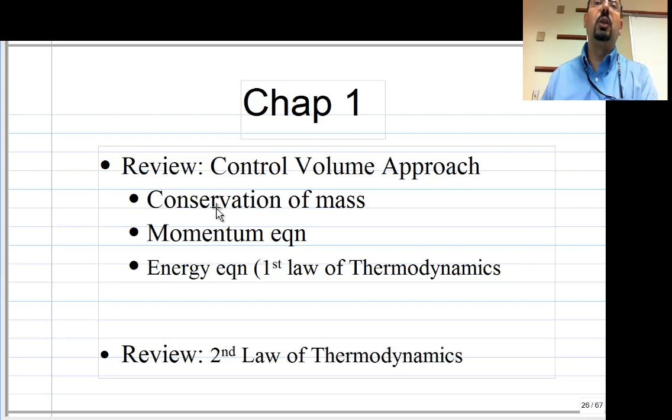Well, let's start reviewing the control volume approach, which includes the conservation of mass, momentum equation, energy equation, and the second law of thermodynamics.

As well, right? So if you open any fluid mechanics book, they will always start with the definition of what is a fluid and how is it different from solid mechanics.

The difference is that a fluid cannot withstand shear stress. The moment you shear it, it will move. But a solid, rubber or steel or whatever, if you basically shear it, it will deform and then stop.

A piece of rubber, you can basically shear it, it will deform a little bit and then it will stop. It takes more force to push for the next degree, and even more force for the next. If this was a piece of wood or steel, you really need to spend a huge amount of force to make even the slightest change.

This is not the case for fluid. Even for the most viscous fluid, still in principle, you shear them. By shearing, I mean you're not pushing on them, you are moving parallel to them. If you are shearing them, they will not resist the movement and they will move.

Of course, the strain rate, or basically how quickly do they move, is different if they are ketchup or water or crude oil. The more viscous, the more force it takes for them to actually move faster.

In this slide, I just would like to remind you that the molecules, if you go to the molecular level, say water as liquid and water as steam—for water, in both cases, if we open a microscope and look at those molecules, they're exactly the same. H2O molecule as water and H2O molecule as gas or vapor or steam, it's exactly the same. So why are they different?

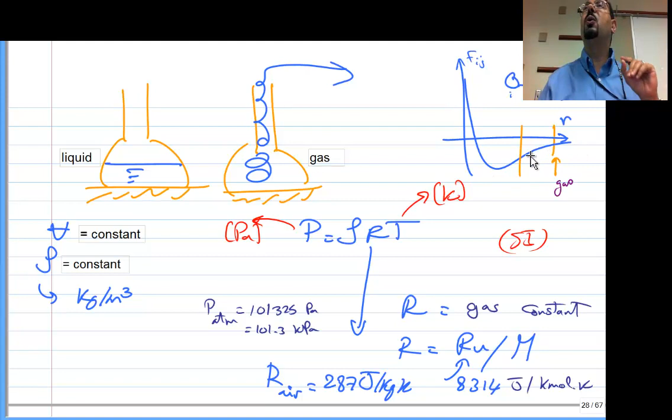So on the way to becoming liquid, in some applications, when the temperature is really cold but not cold enough to become liquid, and the pressure is really high but not high enough to become liquid, you're not dealing with ideal gas anymore - you're dealing with something called real gas. Real gas has a more complicated equation than ideal gas. Any gas that you push toward becoming liquid will start to become a real gas. So it depends on your application whether this approximation is good enough, or whether the temperature is really low and pressure really high enough that you need to move to the real gas equation.

So in this course, no matter the temperature or pressure, we are doing ideal gas. For the rest of the course, forget about real gas - it's P equals rho R T. We'll take the easiest way out and call our gases ideal gas. But know that if the pressure is really high or the temperature really low, you may deviate from ideal gas.

For example, that's why in thermodynamics with steam, you don't use P equals rho R T, even though steam is a gas. Why do you keep using steam tables instead? It's because steam is not really superheated enough to be treated as an ideal gas. So the air in this room is ideal gas - why? Because at 85 Fahrenheit, it's very far away from its liquid state. To make nitrogen liquid, the temperature needs to be really low.

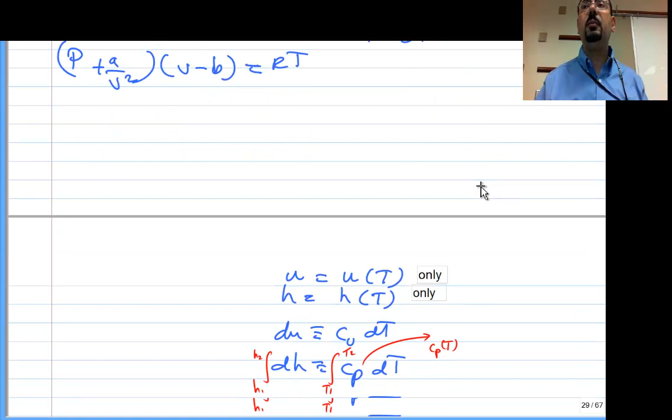So we said we are going to follow basically the ideal gas equation, P equals rho RT. The enthalpy H and the internal energy U are actually properties. To get the enthalpy, you need two properties, you need to know the temperature and say the pressure. Remember in the steam table, you need the temperature and the entropy, or the temperature and the specific volume, and then you can put your hand on the enthalpy. So it should be a function of two properties. But we will actually deal with just H as a function of T and U as a function of T. All right? So, thermally perfect gas.

Not only that, but by definition, dH is Cp dT. Cp is the specific heat at constant pressure, and Cv is the specific heat at constant volume. That's U and that's H. So by definition, dU is Cv dT and dH is Cp dT.

What does that mean? If you want to get the difference in enthalpy as you heat the gas from 100 degrees to 200, you need to integrate over Cp. You say Cp dT and integrate. We are not going to do this, we will just assume constant Cp and constant Cv. In the exam paper, on the cover, you will see for air Cp is 1004.5 joule per kilogram Kelvin, for example. But know that Cp is really a function of temperature. You cannot just take it outside the integration and say dH is Cp delta T. That's only if you assume constant Cp and Cv.

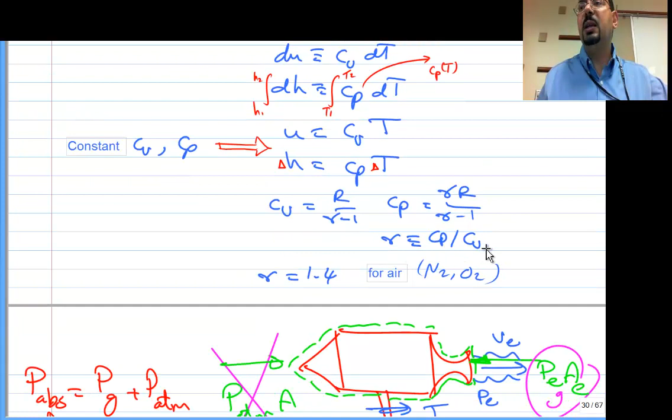Cv is R over gamma minus 1, and Cp is gamma R over gamma minus 1. When you divide the two, R and gamma minus 1 cancel, and you end up with gamma equals Cp over Cv. By definition, gamma, the specific heat ratio, which is very important for us in this course, is basically 1.4 for air. So gamma is the ratio between Cp and Cv. If you open other textbooks in the library, you will find that sometimes gamma is called K instead.

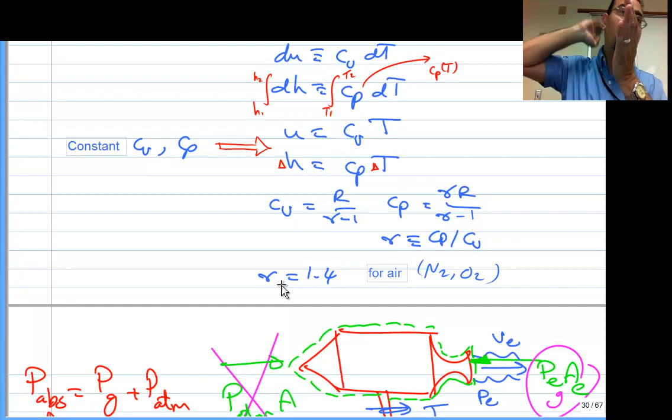But anyway, this ratio will show up in all the equations, to the extent that the appendix C's at the end of the book, for every chapter, have appendices we can use for solutions. You will find in every chapter there are three appendices for three gammas. So the difference would be, this table is for gamma 1.4, this is for gamma 1.3, this is for gamma whatever.

Very good, so now the pressure. You know there is something called absolute pressure and something called gauge pressure. The difference between the two is that the atmospheric pressure is subtracted. Let's say in this room the pressure is atmospheric, 101.325 kilopascal. Let's say for whatever reason someone pressurized the air in this class and it's not 101.325, it's 102 — that's the absolute pressure. So if I ask what is the gauge pressure in this room, you would tell me 102 minus 101, so the gauge pressure would be 1 kilopascal. The absolute pressure is 102, and the gauge pressure, how high you are above atmospheric, is the gauge pressure.

I remember, when taking my fluids course as a student, one of my biggest problems was knowing when to use gauge pressure and when to use absolute pressure. That was a horrible problem for me, I couldn't really answer it, and I spent a lot of time with my TA trying to understand it. So, when do I use gauge pressure and when do I use absolute pressure? Here is when.

When you are using the ideal gas equation, P equals rho RT, let me ask first, what temperature should you use, degree C or Kelvin? Kelvin, the absolute temperature — that's what will remind you. If you use the absolute temperature, then you must use the absolute pressure. So when it comes to the equation of state, use the absolute pressure. When you think about it, the equation of state really needs the actual pressure, the real pressure, not the difference between that pressure and the pressure outside.

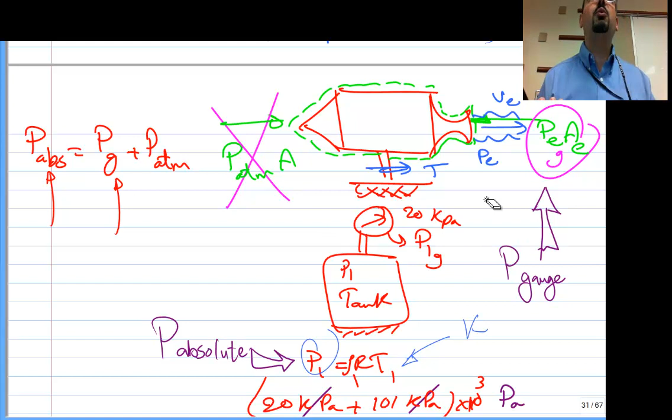It's useful when you are doing force calculation, when you are using the momentum equation to find the thrust on a rocket engine. Anytime you use the momentum equation to find the forces, you have to include all the forces acting on that control volume, whether it's a jet engine or a jet ski. That's your homework, we'll see it at the end. Your homework is a jet ski, and you're trying to find the force that the engine generates. So you want to put the forces.

So what are the forces acting on a jet engine sitting on a test stand in your lab you are trying to test? One of them would be the pressure forces, right? So you will have to put the pressure at the exit. I'm calling it P exit, area exit. That's the force, because what's the unit of pressure? Pascal, which is Newton per meter square. So that's why when you get the pressure force, you multiply by the meter square, you multiply by the area, so you get the force. So the pressure force is the pressure times its area.

So I will put P exit, area exit, like this. And by the way, is P exit atmospheric, higher than atmospheric, or lower than atmospheric? What do you think? Because it has velocity.

I don't think that's right. I think as soon as it leaves the end, it goes to atmospheric. That's a good point — he will need to feel the outside, and the outside is atmospheric, right? Anyone? So I heard lower than atmospheric because it has velocity, and he needs to feel what's going on outside and adjust himself. Anyone saying higher? Anyone?

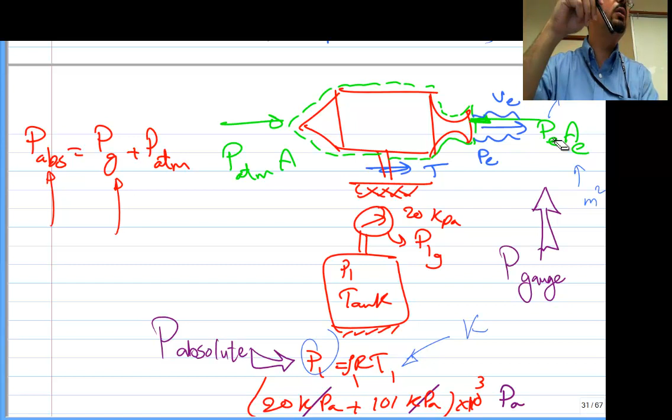So if this was a subsonic jet flow, it has to be atmospheric — there's no question that it has to be atmospheric. He would feel the pressure immediately. But supersonic flow has a mind of its own. He can afford to be different. He can actually leave lower or higher than the pressure outside, but eventually he needs to feel the pressure outside.

That's why those diamonds — we'll spend one chapter trying to understand those diamond trails behind an airplane flying. It was because of this: he was trying, 'oh, I'm higher than the atmosphere, let me get lower, oh I overshot, let's go higher, lower, higher, lower,' until eventually he settled down on the atmosphere and basically just become atmospheric. So as long as the problem says it's subsonic, we're good at P equals atmospheric. But really subsonic — so actually forget about this, it's like Fluids 1. In this course we can afford to be different.

So this P exit can be either higher or lower than atmospheric pressure, right? It can be either higher or lower. So now the other side I have to put P atmosphere, right? Is P atmosphere only on the front? All around — it's actually everywhere.

And look at this geometry — if I'm writing the x momentum equation, because the momentum equation can be written in the x direction or y direction. In the homework, you will choose what direction to write to get what you need. For example, here, if you want to get the thrust, are you interested in the x or the y? You want the x momentum equation, because that thrust will show up in the x momentum equation.

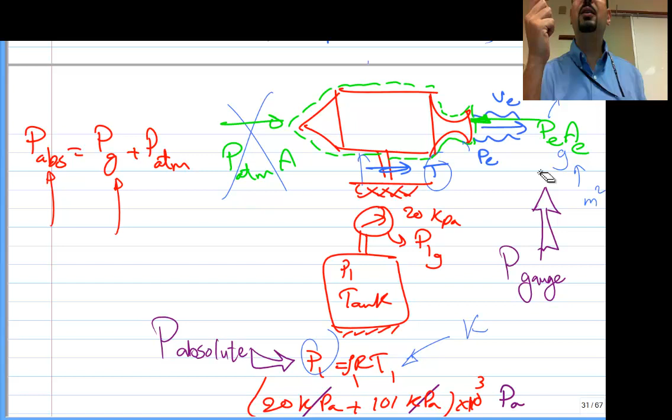So that was pretty good when I was undergrad, except the homework problem came with this rocket that went to space. Now I'm lost again. What should I do now? Should I use absolute or gauge in space?

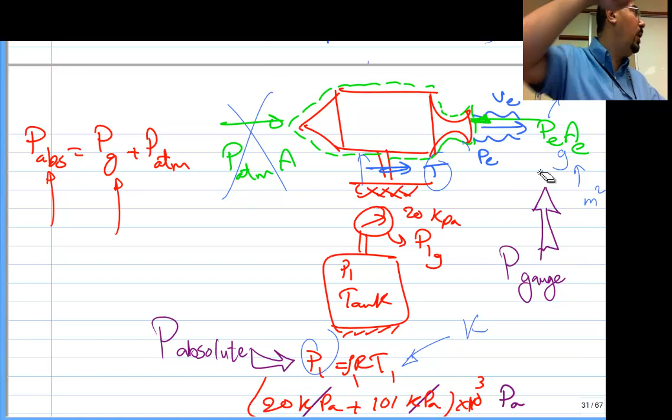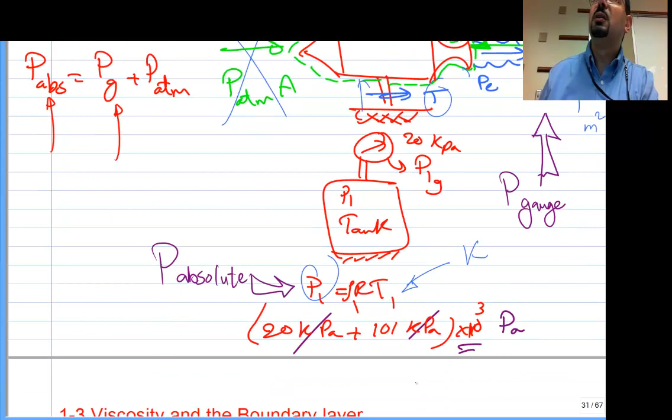Doesn't matter. It doesn't matter, but you want to memorize the rule. Well, if you go to space, you don't have to worry about the atmosphere because everywhere it's zero. The ambient pressure is zero everywhere, right? So you use the gauge when you want to cancel the atmospheric pressure everywhere around this, and use the absolute in the equation of state, when you say P equals rho RT.

The viscosity and the boundary layer. So in this course, you will see me drawing velocity profiles like this. The velocity is uniform throughout the nozzle -- the area is getting bigger or smaller and the velocity is changing, but I will plot the velocity profile uniform all over the place. That's a simplification, that's not the true thing.

If I zoom in near here, near the wall, you will see something like this. This is called the boundary layer. You will learn about this in 4273 -- let's call it fluid 3 -- that's experimental fluid dynamics. You will hear about how to calculate this. This is actually very important when it comes to friction -- all the friction loss with the wall happens in this place.

As a matter of fact, the flow on top of that boundary layer can be considered as if it's inviscid, or frictionless. There's no friction on top of that. All the friction is located near the wall. And so when you think about it, why is it sticking to the wall like this? Why does the velocity here need to be zero like this? Why is the wall holding it?

Because it's not perfectly smooth. If you zoom in here again, let's magnify our microscope and look here. The wall, no matter how perfect your machining is, even if you did the best polishing ever invented, the wall on a molecular level is basically this rough. Those blue dots, that's my impression of molecules -- so here is the air molecule. They cannot afford to go with a different velocity than the wall. Why? Because they are not really on the wall, they are in the wall.

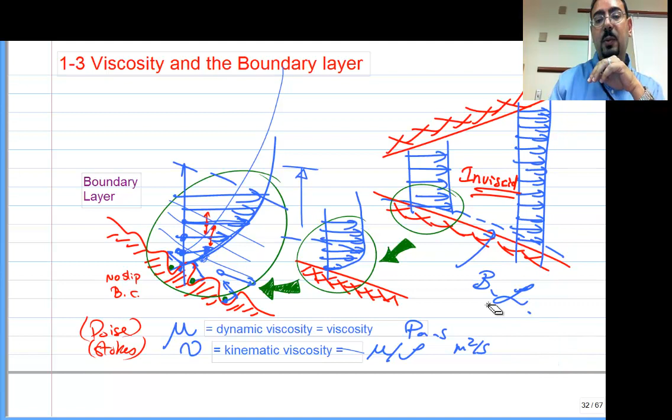So what I'm trying to say is that we will ignore this layer for the majority of this course. Only when we get to chapter 9 will we consider flow with friction. And even in that chapter, we'll basically just calculate the friction loss. But we'll still mainly care about the majority of the flow, not that small part near the wall.

Yes, Yang? So say you have something pushing from behind, like a piston. What would the velocity be just where it's touching the piston? Would it be the speed of the piston? So if the piston is moving like this in a cylinder, the question is what the velocity profile will look like. We'll actually deal with this in chapter 2. We'll see a piston moving and what happens. But basically everyone in front of the piston doesn't have a choice, they've got to move or go into the piston, which they can't.

But then over here, what do you think happens? Those a little bit far away from the piston, they're going to have a delay. So Tim is saying the same thing, that if the piston moves, everything should move. Tim is thinking Fluids 1.

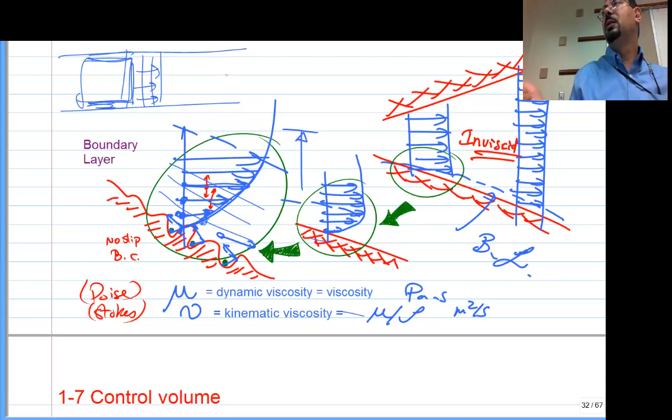And that's true, if this was water, when the piston moves, the whole thing moves. But if this is compressible flow and that piston moves, we'll see the answer in chapter 2, you'll see this next week. We'll spend time understanding how much difference it makes that the flow is compressible. But basically, incompressible flow is like this fluid is a piece of stick, a stick of wood. Imagine if you push one side of the stick, what happens to the other end? The whole thing moves as one piece. That's what incompressible fluid does, but not compressible flow.

Okay, so now to review the control volume approach, this is what you had in Fluids 1. Basically, the difference between a control volume and a system is that a system is when you care about a bunch of molecules, you know them by name, like a bunch of students. You are tracking those students as they go outside the classroom, start going to their cars, moving with their cars to different places. At every moment, the number of those molecules, the number of those students, is conserved. They cannot disappear, and no new student can be created, right?

But if you care, and that's the case in most engineering applications, we don't care about an air molecule, we care about a volume, our jet engine, our classroom. How hot does it get? You have a space, and you care about that space, its mass, forces acting on it, its energy. So that classroom can see an increase or decrease in the number of students in it. So the physics of a system is pretty simple. For example, dm/dt for a system is 0. But dm/dt for a control volume, is it 0? It can actually be plus or minus, depending on what?

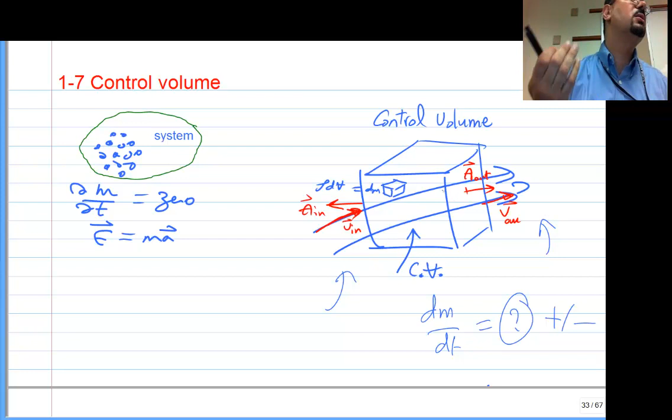That is actually the second homework problem that you have. You have an air tank fed by a compressor at a certain flow rate. The outlet, a toolbox or a tool using a certain flow rate to run, and he's asking you about what happened to the mass inside that tank. Will the mass build up or will the mass decrease?

So how do you solve a problem like this? The continuity equation, right? The continuity equation, the momentum equation, the energy equation, they are all actually copies of one big equation. It's called the Reynolds transport equation. All of them are basically just telling you what happened to a property that you are tracking over that control volume. What happened to that property? Will it disappear, decrease, or increase?

So this is a fancy name and a fancy equation for something that's really simple, all right? When I was a student, I loved to write this equation. It made me feel so smart because, I mean, look at it. That's a triple integration, and you have partial t in front of it. And look at this. This is the integration over the surface, and you have two vectors dot product. You write this equation in front of any of your friends that's not in engineering, and it's like, wow, is this English? What is that?

That's amazing. But this equation, you never really use it in that form. We use it in a much simpler form, but this is a more general form that can deal with any problem, right? This equation basically tells you that x, that property that we are tracking, whether it's mass, or momentum mv, or energy—not just kinetic energy, which includes kinetic, potential, internal energy, all energy, capital E. So that small e is not internal energy, that's the total energy per unit mass. Any one of those is x that we are tracking, right?

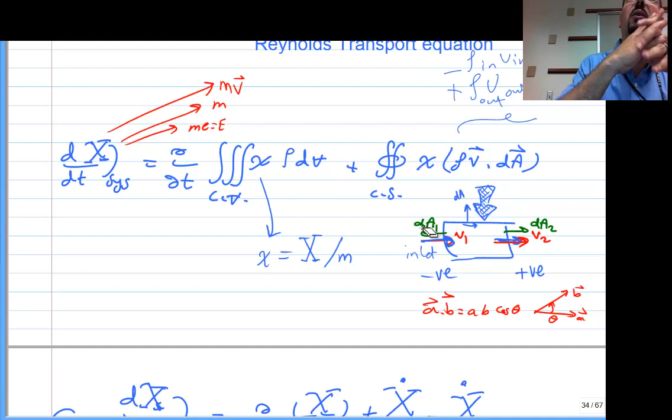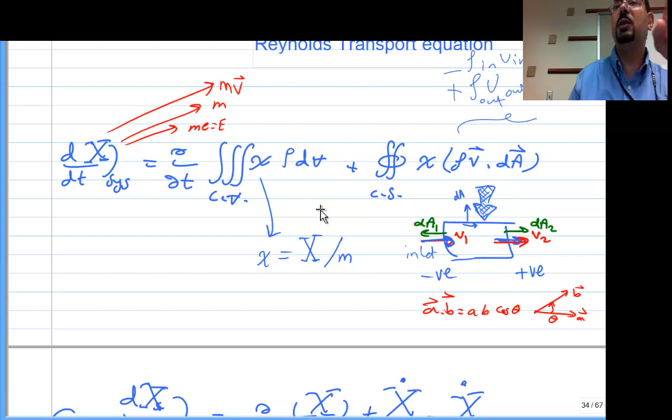Okay, so this fancy form, I would encourage you to keep writing it to convince yourself you're really smart. It did work for me. I really like writing it.

This will actually just boil down to this when you think about it. He's basically saying dx by dt system is what? X rho dv. Rho dv, that's density multiplied by volume. That's dm, the mass of a small place inside the control volume, multiplied by the small x. That small x is capital X over m, it's the x per unit mass. So if I multiply the x by all the mass, what do I get? All the x.

Again, it's partial t x control volume, or basically the rate of change of that x. How much does the mass inside the control volume change with time? Is the compressor tank building up or depleting?

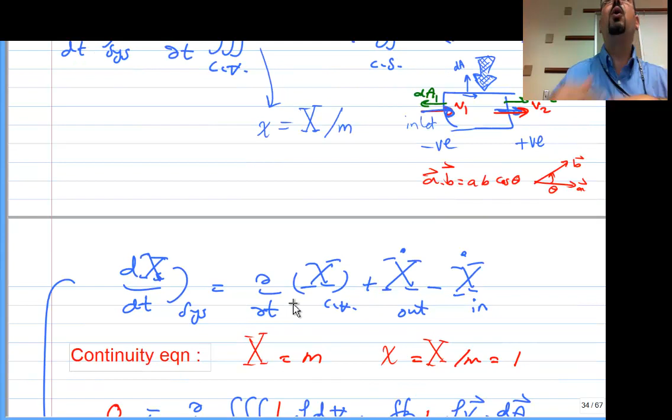So why all the trouble? Why couldn't he just have said partial t x control volume? Because he was basically saying, in case you have a tank with different fluids, maybe you're working in a refinery, and that lower layer is really heavier than the higher one, you have different density. He's basically telling you, well, each volume by its density, each volume by. So this is kind of the general form, all right, that will work for any problem. Of course, if the whole thing is one density, go for it. Just partial t x control volume.

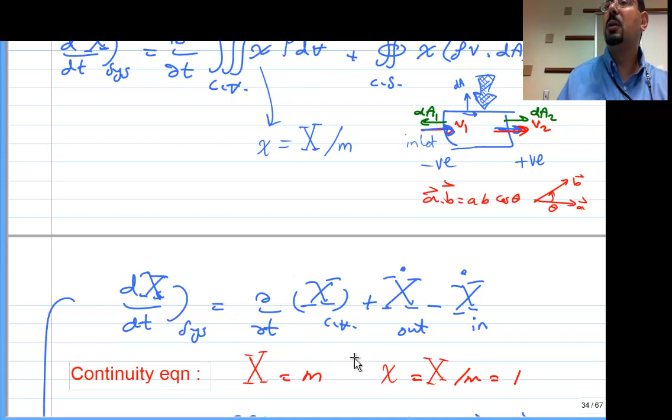And again, this will just boil down to partial t x control volume plus x dot out minus x dot in, that's the rate. So now when you look at this equation, he's basically telling you that dx by dt system is the rate of change of that x inside the control volume plus x dot out minus x dot in.

Don't even worry about this. We are not going to use it like this even. We'll get much simpler than that. Let's worry about the actual cases.

When x is the mass, then dx by dt, the rate of change of mass with time for a system, is 0. And those guys will simply be partial t m control volume plus m dot out minus m dot in. Or if we rearrange, it basically says m dot n minus m dot out. What's m dot n minus m dot out? The net coming in minus the net leaving. That's the net staying, that's the partial t m control volume.

And you didn't need Reynolds to tell you this, you didn't need me to tell you this. If anyone with any sound mind will say, if there is 10 kilogram per second coming in and 8 leaving, you have plus 2 kilogram per second staying in this classroom.

All right, so what I'm trying to tell you is that this is the equation that you worry about. That's the control volume approach to solve the continuity equation. But this is the one that really makes sense when you think about it.

And for most applications, when it's steady state, even this term goes to 0, and m dot in becomes m dot out. If there is no storage, and think about it, most engines are designed so that they wouldn't explode from us, right? Whatever comes in needs to leave. I mean, you'd have a problem if there is a blockage and nothing leaves, right? So most problems, you just have m dot in equal m dot out.

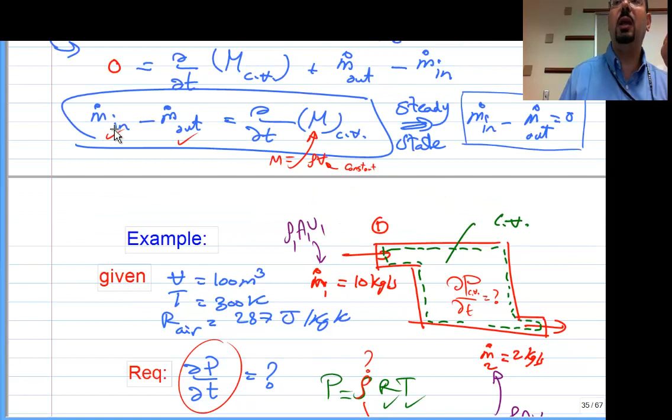Obviously, the mass inside is building, right? And what does he want from us? He wants not just to tell him that dm by dt is obviously 8 kilogram per second, that's easy. It would just be writing this and saying, well, 10 minus 2 equals this, and then it's plus 8 kilogram per second. No, he wants partial P, partial T.

He would like to find out what is the pressure rate of change inside that volume. And he's saying the temperature is constant throughout the problem, 300 Kelvin. Is that a good assumption? Yeah, if the tank is really not insulated and that process happens slowly, the tank will keep up with the ambient and remain at constant temperature. It's not a bad assumption. So how am I going to get partial P, partial T? That's what he's asking for.

So in this course, there are actually 3 equations: continuity, momentum, and energy equation. So when in doubt, when you don't know the answer, you have a 30% chance of getting it right by just basically picking one of them. And since I've only covered the continuity equation so far, chances are the solution will come from the continuity equation.

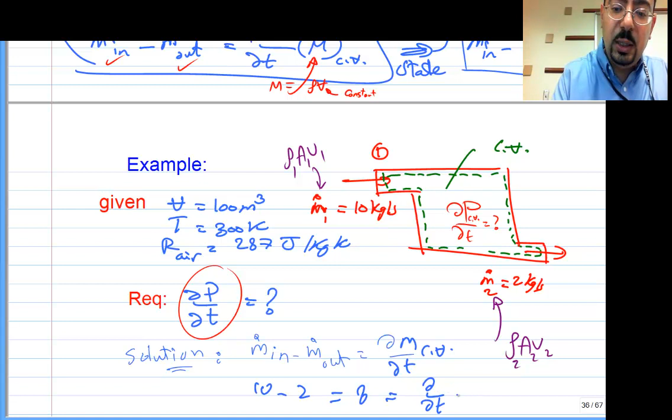So let's write the continuity equation, which will basically say m dot in minus m dot out equal to partial m partial t control volume. And so it's 10 minus 2, so that's 8. Well, that 8 is partial t m control volume. Right, so I did the continuity equation.

Now, how am I going to get the pressure? How is that pressure he's asking for related to the m, the mass inside the control volume that we calculate? The density is, P equal rho RT. What do you want to do with that density? Well, you have your volume. Excellent. How many pounds are inside the tank.

Excellent. So partial t of m is actually rho times V, rho times the volume, and that volume is constant. So actually we can bring that volume outside the differentiation, right? It becomes partial t of rho.

And that density from the ideal gas equation, rho then becomes P over RT. And notice that R is constant, that's the constant for air, and T is constant because he said this problem is isothermal. So I can take all those guys outside, and so it's volume over RT, and then all I have is partial P, partial t.

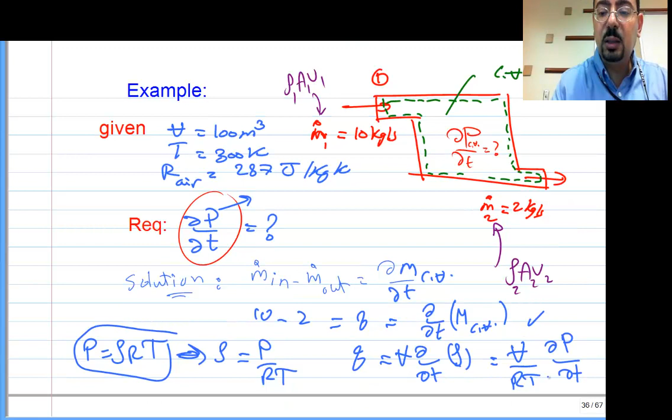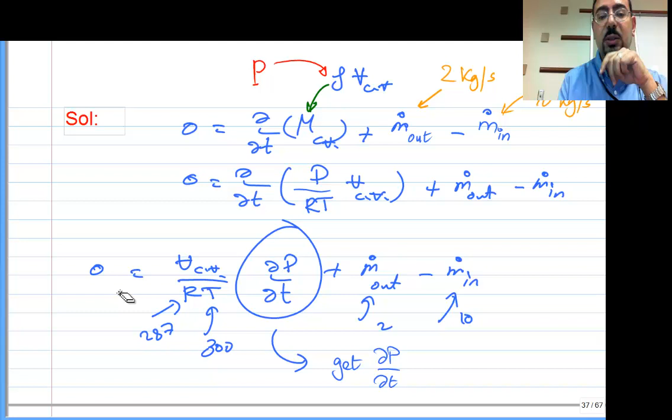All this is equal to 8 kilogram per second. And so we have the volume, it's 100, I have the temperature, I have the R, I've got my hand on partial P, partial t. And so that's a cleaner version of this. It basically tells you that partial t multiplied by the volume over R over T is equal to the difference between m dot in and m dot out.

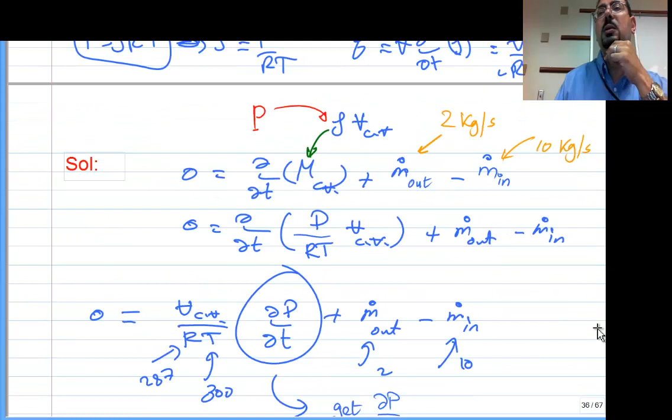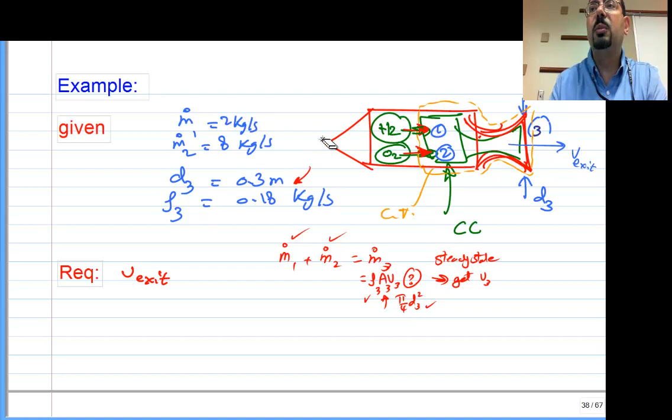Right, question about this? So let's look at another one. So here's a rocket engine, he's got his hydrogen and oxygen. The flow rate coming from this tank, the hydrogen, is 2 kilogram per second, the flow rate coming from the oxygen tank is 8 kilogram per second, and the diameter at the exit of this nozzle is 0.3 meter and the density is 0.18. What does he want? He wants the velocity at this exit. So this is a combustion chamber where he dumps the fuel and the oxygen.

So let me ask you first, is this equation unsteady, so that I would write partial m partial t equal to m dot in minus m dot out, or is this problem steady state so that I could write m dot in equal m dot out? It should be steady state. Yeah, so this rocket is not steady, but the engine is steady state, right? The rocket is losing its fuel and oxygen, but the engine is steady state. That combustion chamber sees a continuous flow of the fuel and oxygen and a continuous exit at the back.

So because the problem is steady state, then, you know, when I was a student, I used to love to write always the equation from the start. Even if I know that it will boil down to m dot in equal m dot out, it just gives me a chance to calm down while solving the problem, because I start with the equation that I know is never wrong. Because the general equation, that's the mothership, all the problems will come from that equation.

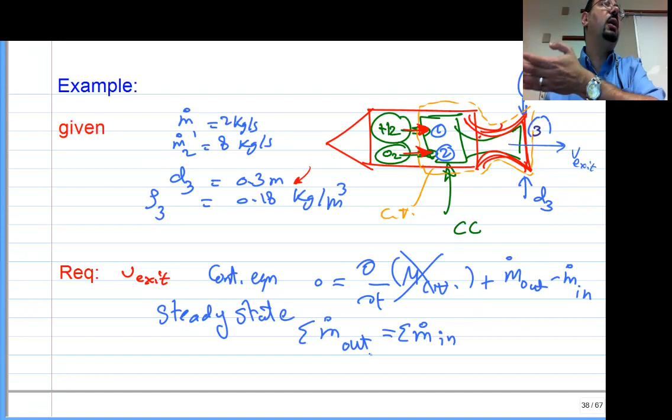So now, since it's steady state, this term will cancel, and we will end up with basically just m dot out equal m dot in. It's actually sigma m dot out equal sigma m dot in, not just one. If you have multiple inlets and multiple outlets, everything coming in should be equal to everything leaving. So this then boils down to m dot 1 plus m dot 2 equal m dot 3.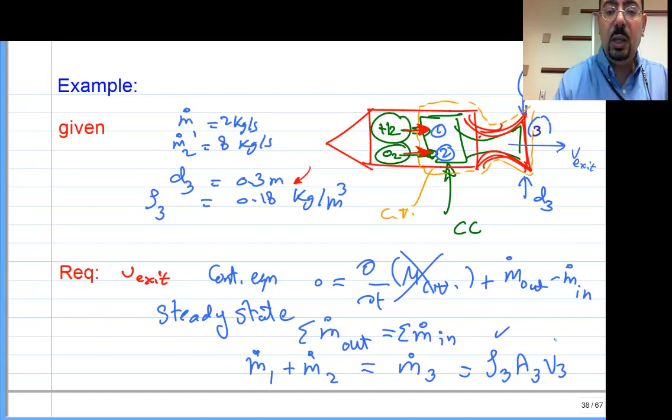And of course, m dot 3 is rho 3, area 3, V3. You have rho 3, the 0.18 kilogram per meter cube, the area 3 - you almost have it. You have the diameter. You know how to calculate the area from the diameter, right? Pi over 4 d squared.

And then you calculate the V that he wants. So here's a cleaner version of it. He's basically assuming steady state, writing the continuity equation, and then calculating V3.

So this cartoon, I just want to remind you that when we say rho A V to calculate the m dot, that V should be relative and should be normal. The normal part, we talked about this, right? Only the velocity component normal to the area really goes through the area.

There is this one country in Somalia, in Africa, that has a lot of rain that comes near the coast, but nothing really goes inside. As a result, the country is almost desert, because all the rain goes parallel to the surface. Because the velocity component is 0, right? It's all parallel. So always remember this: if you're just moving parallel to the surface, nothing will go into the country - nothing will go inside the control volume.

I'm basically saying, if you have a truck and someone is trying to hose you with water, only if the flow crosses the boundary will you end up getting water in the truck, right? So what does this mean? It means that if this car is moving at 10 meters per second and the water jet is also moving at 10 meters per second, yes, there is a normal component - the whole thing is moving normal to the control volume. But if they are moving at the same speed, nothing will go inside. So that's why it's not just normal, but also has to be relative.

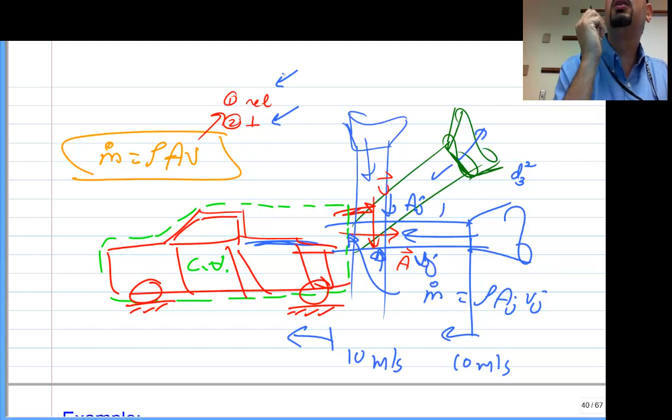What does it mean, relative? There is V absolute, and there is V relative. V absolute is someone standing on the street measuring the velocity of the water as 10 meters per second. A relative velocity would be someone standing on the control volume, measuring the velocity of the jet. So there is an equation - you don't have to guess. Yes, it's 0, but you don't have to guess. The equation is V absolute equals V relative plus V control volume.

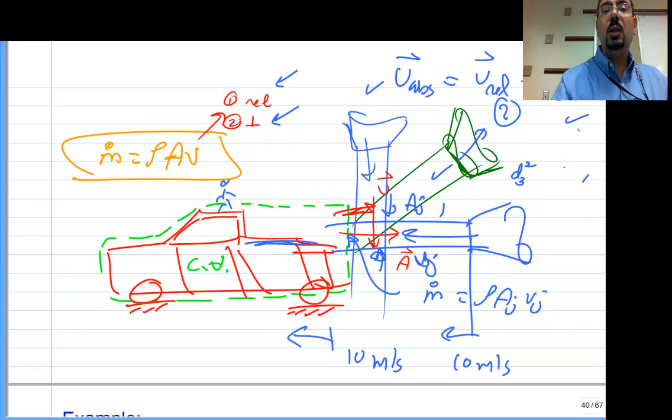So if you're wondering what V control volume is, and you know this one, and you're wondering what V relative is, and you know V control volume and V absolute, all you have to do is say V relative is V absolute minus V control volume. So yes, 10 minus 10, you end up with 0. Those two things are very important: it has to be relative, and it has to be normal to the area. That's what makes the velocity component that you use in the continuity equation correct.

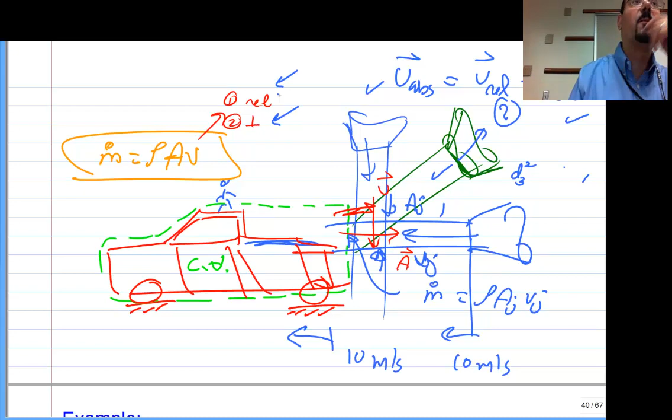You had a question: can you remind me one more time why we consider the rocket steady state? So the rocket itself is not steady state - it's the combustion chamber, this part, the part that I highlighted in orange as my control volume that I'm writing the equation for.

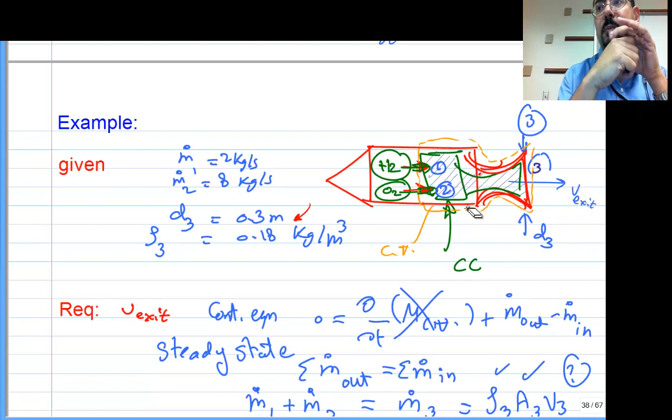So what makes it steady state? If I take a picture now, and then wait until the exhaust comes out and take another picture, that's not steady state - something is different. But the combustion chamber itself, if I take a picture now and take a picture after a few seconds, doesn't have any change in it, right? So the mass of the control volume, which is the combustion chamber, not the whole rocket, is constant. Nothing gets stored, nothing gets depleted. So in short, if partial over partial T is 0, that's what makes it steady state.

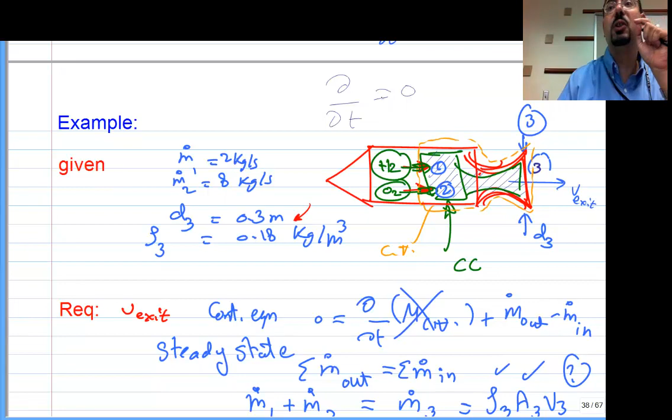Okay, for the problem, partial T is 0. So again, the velocity component that we should use here, it should be relative and normal.

In this problem, there's a nozzle and a shock wave standing like this. You can see the shock wave. We'll spend one chapter understanding what this shock wave is. It looks, even in the picture, like a discontinuity in the flow. It's very, very thin, on the order of magnitude of the mean free path. We're talking about a very, very small distance.

The flow before it is Mach number 2, and the flow after it is Mach number 0.5. What happened? It's as if someone brought two things and patched them together. Like the new Honda Odyssey, you feel like someone brought two cars and patched them together. Exactly, there's a discontinuity, right? That's what a shock wave is. Basically just two different flows. What happens there, we will spend chapter 4 on it.

In this problem, he's giving us things at 1, and he's asking basically for the velocity at 2. And this shock wave is so thin to the extent that area 1 is the same as area 2. So although in real life it's like something like this, it happened over such a small area, such a small space, that area 1 is the same as area 2.

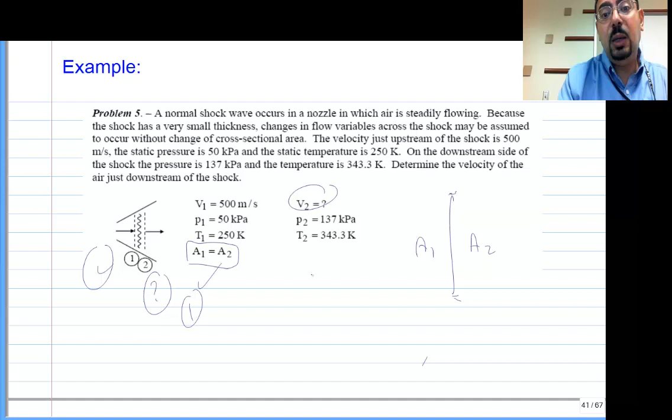So knowing V1, P1, and T1, and P2 and T2, he would like V2. How do you solve this problem? You know everything before, and you would like to know the velocity after. How do you solve a problem like this? P equal rho RT will only give you the density, right? Rho RT, we will use this to come up with rho 2. But where is the velocity? How can I get V2?

The velocity after the shock. Well, wouldn't you just set them equal to each other? What equal to each other? The two sides, yeah, what exactly on the two sides? You want to say what equal to what? Area 1 and area 2? That's what you... the density as well. You'd have to do the density as well. You want to tell me rho 1 equal rho 2?

Well, it's the mass flow that is equal. The mass flow, so it's rho A V. Right, m dot 1 is m dot 2. And let's ask ourselves why m dot 1 equal m dot 2? Who said this problem is steady?

I want someone to prove to me that this problem is steady. The problem says it's steadily flowing. That means that this thing is standing in its place. But what I'm saying, why is the mass... it's not increasing or decreasing, it's only what comes in. That's my question, why?

So what do you mean the area is the same? That's the right answer, but I want to put more words into it. What do you mean area 1 equal area 2? That's why the mass flow rate is the same as the mass flow rate, because if area 1 equal area 2, that means... I want someone to give me just a little bit more than it's the same area, it's the same place, it's not moving. I want one more statement.

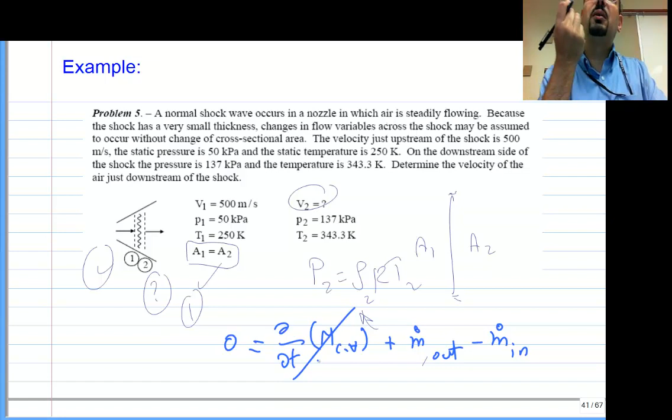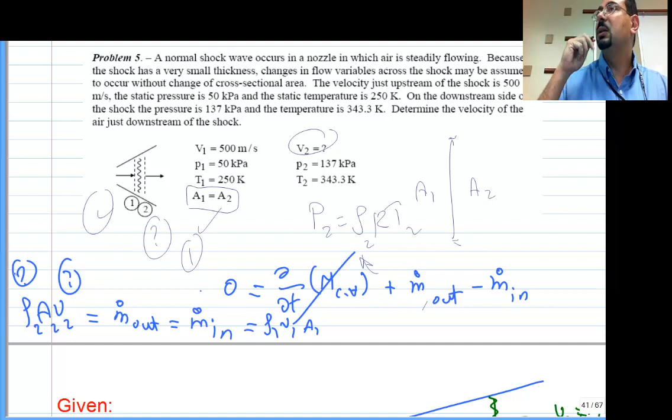After that, the problem is easy. M dot out equal m dot in, and m dot out is rho A V, with rho 2, area 2, V2, and m dot in is rho 1, area 1, V1. So we basically got everything at the inlet. The only thing that's missing at the outlet is V2 and rho 2, and that's when rho equal P over RT comes in.

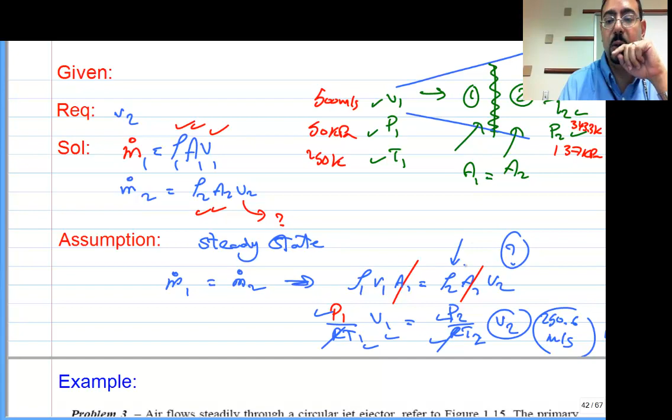So here's what's going on: he basically says steady state, m dot 1 equal m dot 2, and he set the two equations together, and the only thing that's missing is V2 once he puts his hand on rho 2. All right, I'll let you solve this one, you have it in the notes.

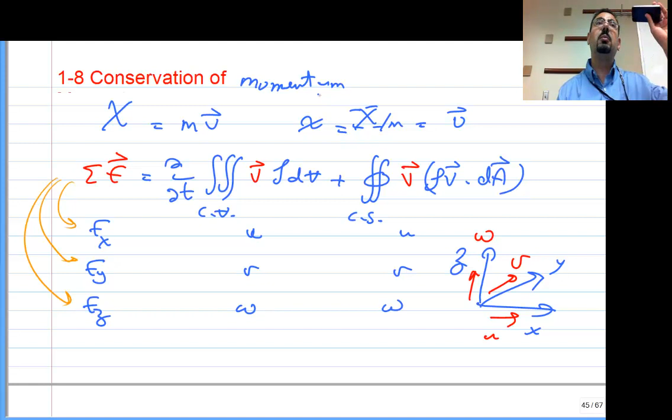Conservation of momentum: mv, that's momentum. So dm by dt for a system, what's the rate of change of the mass of that iPhone? Zero - he's not going to lose his mass, he's not increasing his mass. But the momentum of that iPhone could change, right? That iPhone could be standing like this and then start moving. Why? Force. You give him a force, he increases his momentum. That's Newton's second law.

Remember here there was partial dx by dt of a system, that's the force. So the forces acting will change the linear momentum of the control volume. What is the linear momentum of the control volume? There's momentum leaving with the flow, momentum coming with the flow, and the control volume itself could have its own momentum. It could be a rocket engine that's accelerating, or a jet ski - it could change its velocity, it could add. So here is the momentum equation.

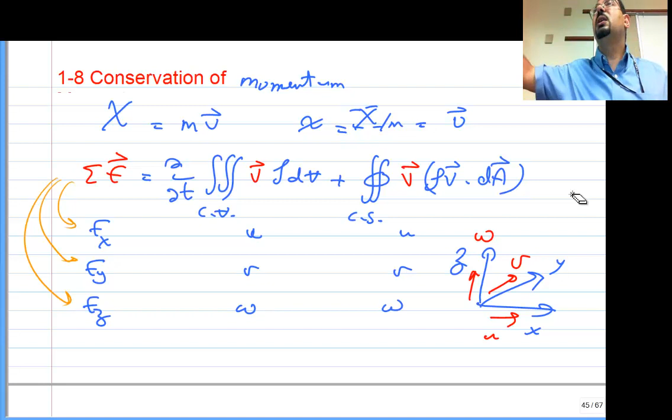That's the fancy form that just looks nice, but we will solve it in a much easier form. I just want to tell you this is actually not one equation - it's 3 equations. You see those vectors on the force and the velocity? That means I can write this whole equation in the x direction, y direction, z direction. So this is 3 equations, not 1, and we choose to write the one that's useful for us. We want the force in the x direction, we write the x momentum equation; the y direction, the y momentum equation.

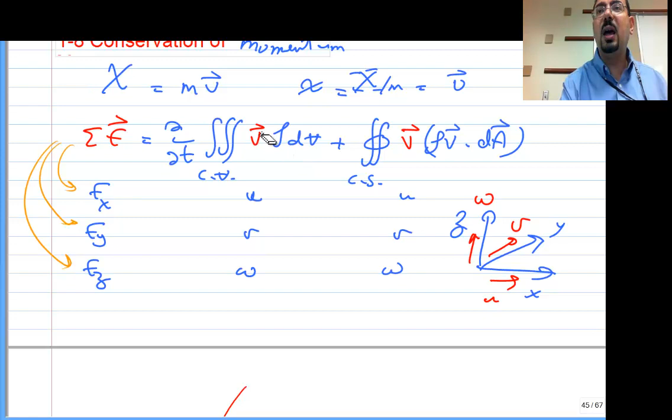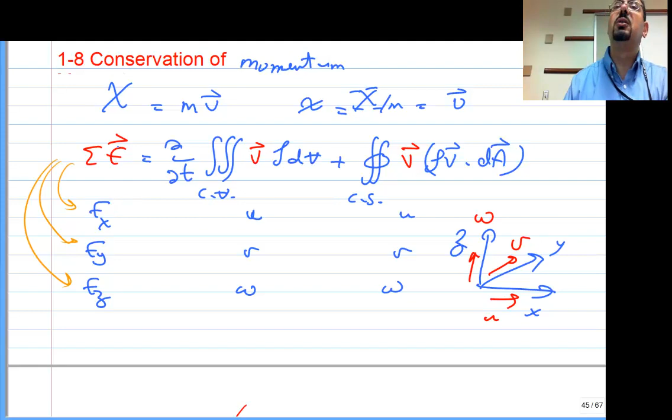So again, the whole thing here is basically just mass times velocity in case the mass is uniform. So you end up with mv control volume. And this over here is simply rho VA plus rho VA for m dot out, minus rho AV for m dot in - that's why you see plus m dot out and minus m dot in. And the small x that was here is now basically v, and here that's dx by dt, that's the force. So that's how the momentum equation looks.

So now those velocities - there's a velocity inside the m dot, and that velocity in the m dot, does it have to be relative or absolute? The velocity I used to calculate m dot as rho AV, does it need to be relative or absolute? It has to be relative, always relative. Because if it's absolute, you may make a mistake - like a jet engine moving at 10 meters per second, you'd think you have a lot of flow rate, but no, it's 0. It's the relative velocity that counts.

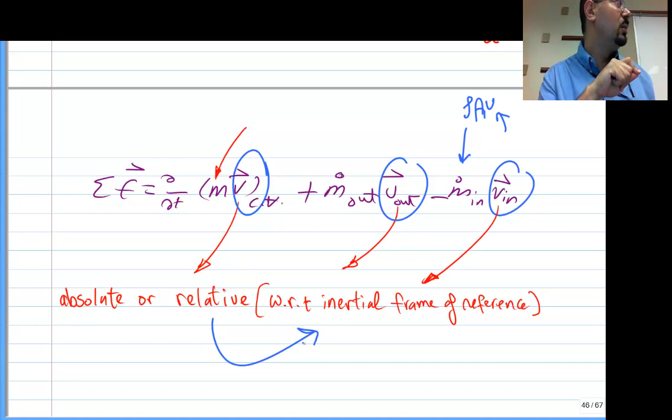So something like this is not an inertial frame of reference. If you use velocity relative to it, you will be making an error in the problem. So you would have to use the absolute velocity — the actual velocity with respect to someone that's not moving. But if the thing is moving with uniform velocity, then both of them work.

But again, you have to treat all of them the same way. The three velocities — at inlet, outlet, and the control volume — should all be either uniform, all relative, or all absolute. Questions?

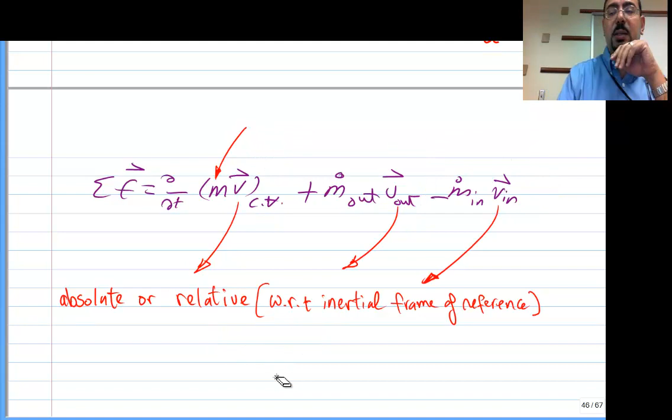So let's see some examples on this. This is a rocket engine sitting on a stand. So it doesn't really matter, absolute or relative, in this problem because the control volume is not moving. So the velocity relative to it, or the absolute velocity, is the same.

Anyway, what he basically says is that there is stuff leaving behind — hot gases at 800 meters per second. Look at the pressure: 50 kilopascal. It's not atmospheric. He can do this because it's probably supersonic, so he can go with lower pressure than atmosphere. It can work. It's possible. And area 2, that's the exit area, is 0.01, and this is the mass flux.

So what does he want? He wants the thrust that will be generated on the test stand holding the thing. Right?

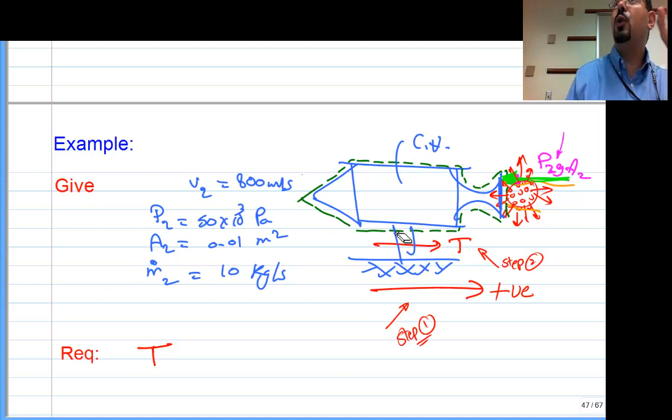So what equation should I use — continuity equation or momentum equation? No, when we ask about forces, it has to be the momentum equation. See, the momentum equation has the force in it.

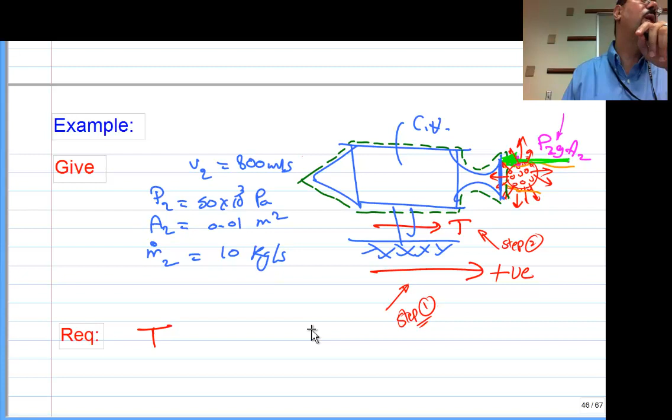And only the x direction, right? We don't have to write the y momentum equation. Actually, when we write the y momentum equation, we will get 0 equals 0. I mean, there is no force generated vertically, and there is no velocity in the vertical direction — everything is leaving horizontally.

So what I'm saying here is that before you write the momentum equation, before you try to calculate the force, step one is: decide what is the plus direction. Any vector equation — even if we are writing only the x momentum equation, forget about y and z — even in the x, the force can be plus 800 Newton or minus 800 Newton, depending on whether you're in the x direction or the opposite x direction.

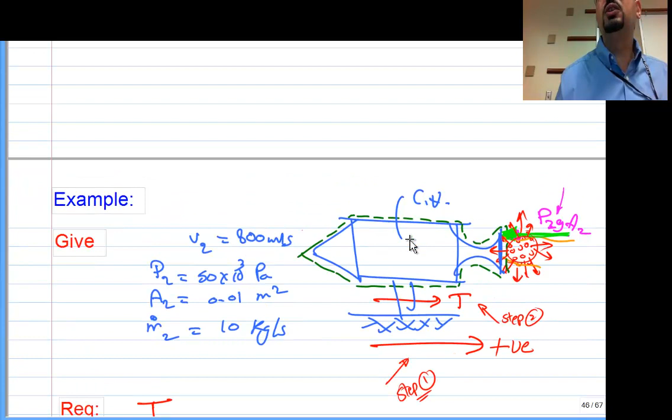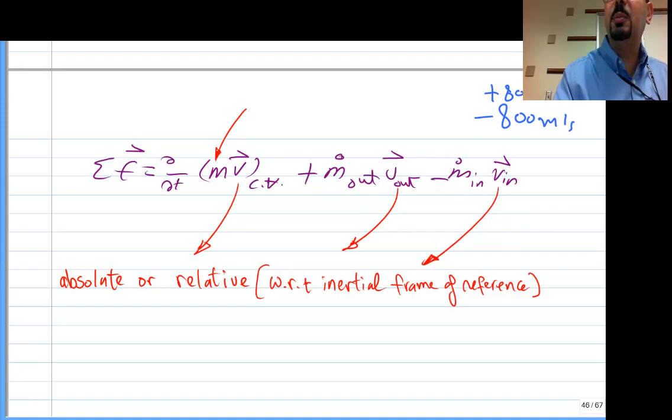The velocity over here, you will not write 800 meters per second. This has to be minus 800 meters per second or plus 800 meters per second. What will decide plus 800 or minus 800? Your sign convention — this guy. You can make it to the right or to the left; it doesn't make any difference, just stay consistent with it. You stick to it when it comes to velocity, when it comes to forces — all the vector quantities. Of course, when it comes to m dot, there's no sign. But the velocity and the force need to follow that plus direction.

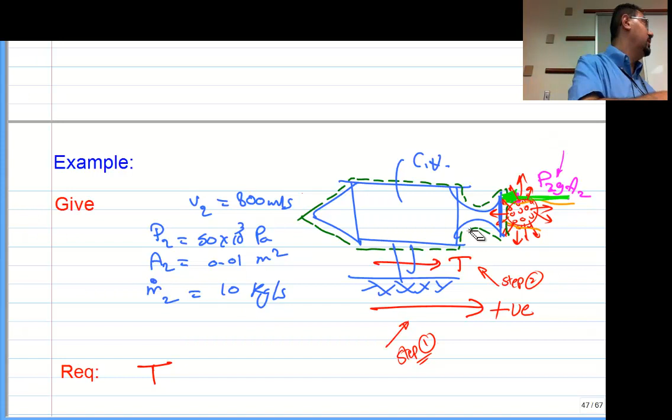So the first step is to decide this is the plus — I'm going to take it to the right. The second step is to start putting the forces acting on the control volume. The control volume is my rocket, so it will feel a force from the stand. I mean, that rocket engine is actually pushing the stand, but because the stand doesn't want to move — otherwise you're in trouble if this thing starts moving, right?

Actually, this happened one time — the stand got broken, and the rocket engine started flying in the factory, and it really knocked a bunch of walls in the way. So if the stand is strong enough, it will put a force equal to the thrust. They test jet engines by putting them on a stand; that stand needs to build enough force equal to the thrust that engine generates.

That's how they measure the thrust, and they say the test was successful, we generated 8,000 pound force. So that force, what I'm trying to say, is the force on the control volume. So if we calculate this equation like this and find out that the thrust is plus 8,000 pounds, is that correct or

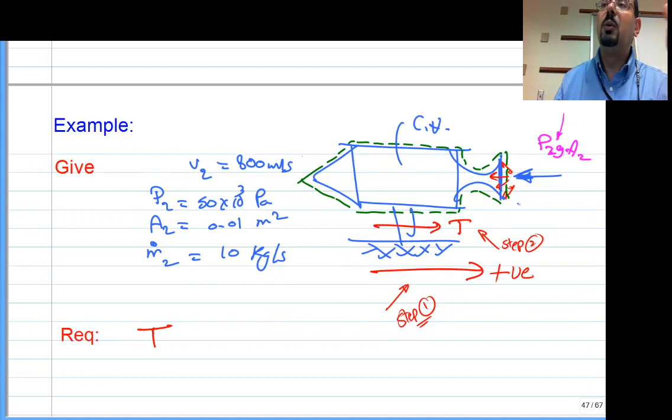So we put the plus direction, we choose it. We put all the forces, which turn out to be just the thrust and the pressure force, and now we are ready to write the momentum equation. So the solution, that would be the y momentum equation, or the x momentum equation.

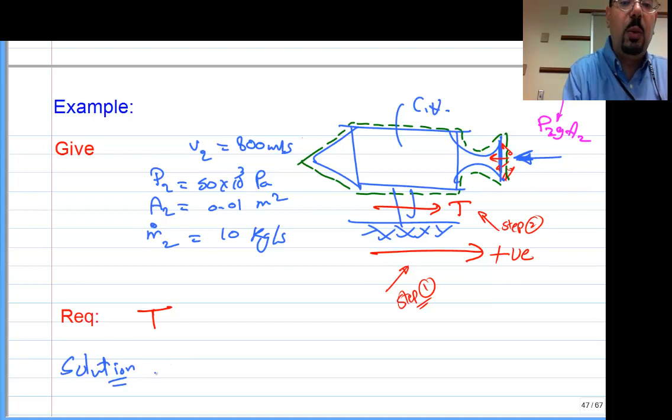This is the y and this is the x. I should write the x momentum equation. So the x momentum equation would be plus T, and why is it plus T? Because it's in the plus direction I chose. It could be minus T if someone chose the plus direction the other way. Minus P2 gauge times area 2, and you know why minus? Obviously, because that's the direction.

Equal to, sorry, partial with respect to t of m v in the control volume, and I'm going to set this to 0. Why? No, not really steady state—that rocket engine is not steady. The control volume is the whole thing, unlike that previous small problem where the control volume was just the combustion chamber, which was steady.

Now I'm saying the whole thing sitting on the test stand is my control volume. So this guy is losing mass. No volume or velocity change—yeah, no velocity, excellent. It's because the velocity is 0, he's not moving. If this guy starts moving, that equation will be different.

Plus m dot out times v exit, which is v out—I'd like to say plus v exit, where this is v exit. And why plus v exit? Because it's in the plus direction. Minus 0. Why 0? Because there is no m dot in.

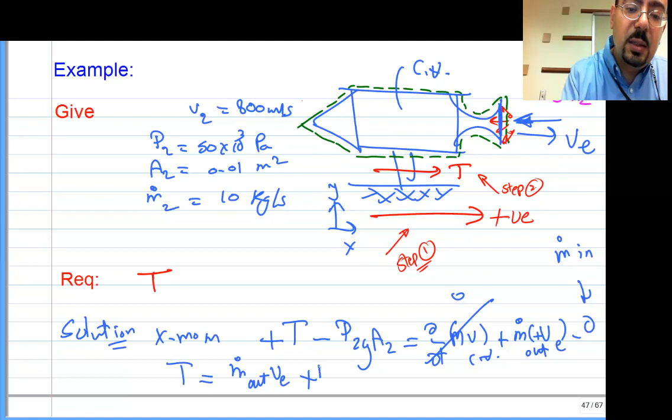All right, so then the thrust is m dot out times v exit, plus P2 gauge times area 2.

So here's a good trick I used to do when I was a student. Even when the numbers were given to me, I wouldn't substitute until I got the final equation, then I'd put the numbers in. I mean, we could have put the pressure in earlier, but no, I would keep it symbolic until the end.

Why did I do this? Well, first of all, it's easier to keep symbols while flipping the page and going from line to line than numbers. Numbers are very easy to screw up. Second, when you keep the symbols like this, you can check the units and dimensions, and that helps you figure out if you dropped an area somewhere in the middle.

So here, what is the unit of P times area? Pascal, or Newton per meter squared, multiplied by meter squared—that is Newton. Thrust must be in Newtons, and if you check kilogram per second times meter per second, you'll figure out that's Newton too, because it's mass times acceleration. Having it in symbols like this lets you check the dimensions.

And you learn a lot actually. I used to spend a lot of time after solving the problem just looking at this and trying to make sense of it. Does it make sense that the result is not 8000 plus 500? You don't figure out what's going on with just 8000 plus 500. But when you look at the symbols like this, you see that the thrust is coming from two things.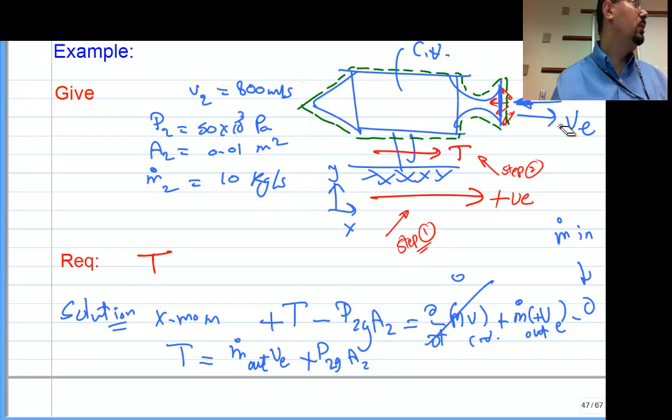Here's the cleaner version of it. He's basically writing the momentum equation, setting this guy equal to 0, and therefore the thrust is... This equation is so famous that later, when we go to rocket engines in the last chapter, we don't write the momentum equation and say this velocity is 0. People actually just simply write this: M dot out V out plus P gauge area 2.

One of you should ask a very good question right now: why is this equation useful? You just said this is only when this guy is not moving. What if the rocket is actually moving? This equation shouldn't be useful—the thrust force is constant.

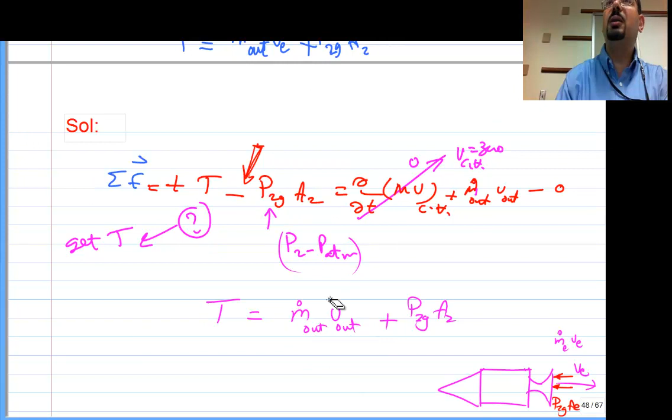Well, it turns out we will make two mistakes that will fix themselves, so it will end up being exactly like this too, but you'll see later on. This equation, I'm telling you, is really useful whether this guy is moving or not. The two mistakes will fix each other, and you'll end up with the thrust having two parts: part momentum and part pressure.

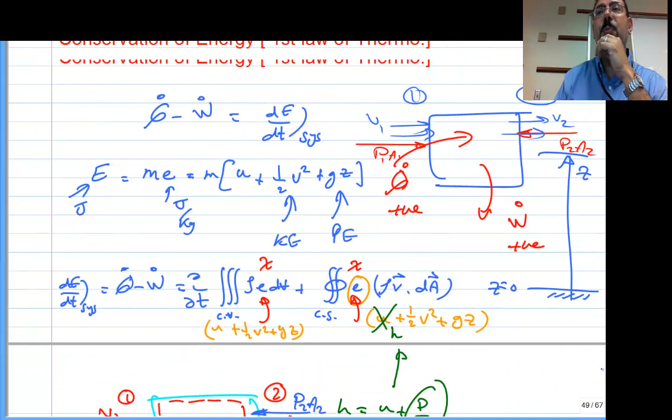So the last part in this conservation of stuff is conservation of energy—that's the first law of thermodynamics. Again, this equation is exactly the same as before, the same momentum equation, the same continuity equation. The only difference is that now the x we're tracking is E, the energy, total energy. So does this room, this control volume, change its energy content?

Yes it can. To start with, there can be energy in from those ducts, energy out from the doors. There could also be energy added by work done on us—like a ceiling fan that will send work in—or energy added by heat transfer from the wall, or internal energy. If you think really hard, you can get hot and that generates even extra energy.

Q dot minus W dot—here's the confusing part—when you add Q, that's plus; when you take work, that's plus. Why didn't they just make anything you add plus and anything you take minus? Probably historical reasons from power plants, where they used to add fuel and then take work out of it.

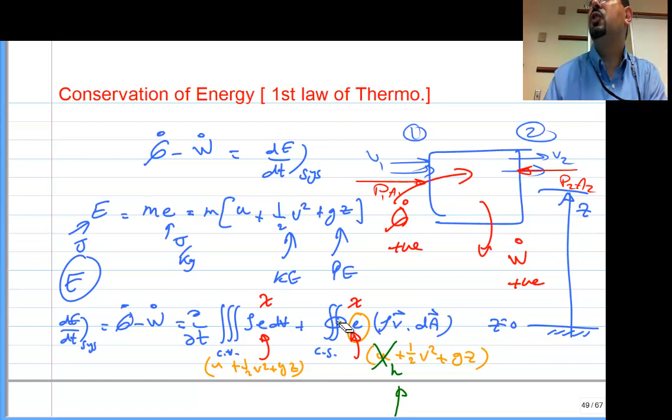Anyway, this net energy in—Q minus W—that's the net work being added to the control volume. That could actually change the energy content inside this control volume. This is partial T, energy inside the control volume, and this whole thing here is m dot out minus m dot in multiplied by the energy leaving and coming.

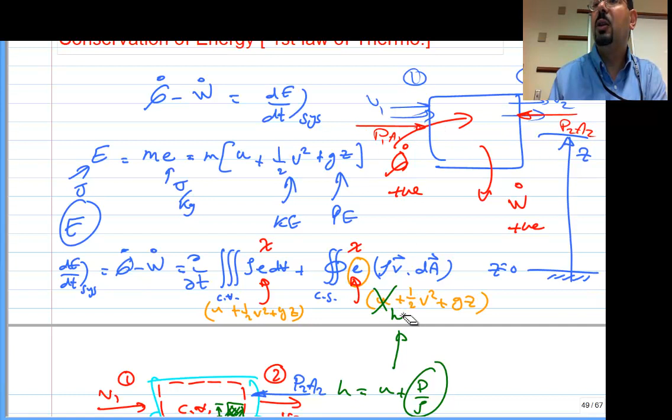One weird thing is that when it comes to the flux leaving or coming in, you multiply m dot by h plus half v squared plus gz—that's potential energy per unit mass, that's kinetic energy per unit mass, and h is enthalpy. But when it comes to the control volume itself, not the inlet or outlet, it's potential energy, kinetic energy per unit mass, but only internal energy U, not H. What's the difference between H and U? It's P over rho, or basically U plus PV. So the difference between H and U is PV, which we call the flow work.

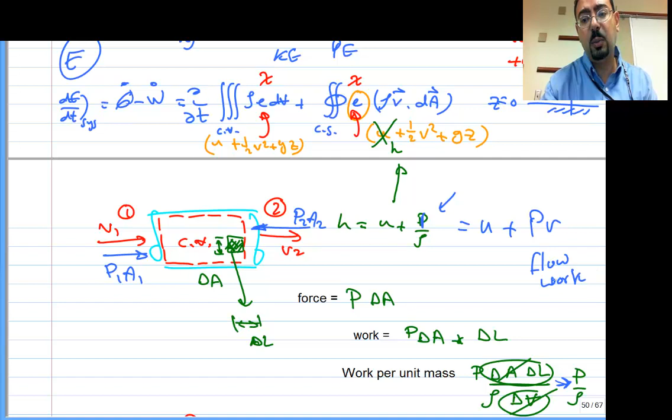For a reason that I'm going to explain in a second: he comes in with enthalpy, but stays inside with internal energy, and then leaves with enthalpy. Why is that? When he's inside, what happened to his enthalpy?

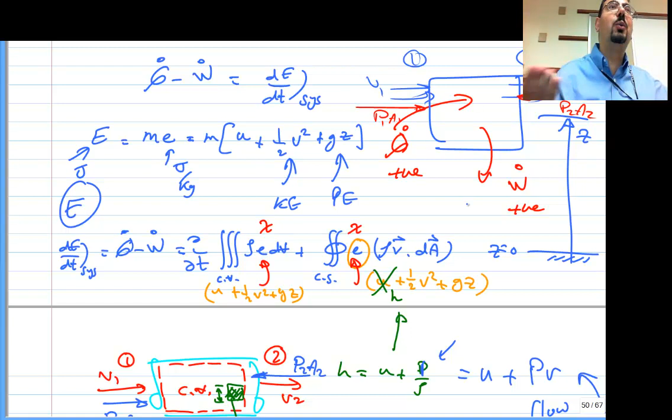So here's why. Remember, there are pressure forces standing outside, P1A1 and P2A2 - that's the pressure force at the inlet and at the outlet. If you consider a small volume of fluid trying to leave, there's a pressure force in front of him, so his friends need to push him so that he can take that work and leave.

That's exactly the two forces. The work done by a force is the force multiplied by delta L, and that gives you the work. The work per unit mass, you divide by the mass, which is rho dV. So you've got P times delta area multiplied by delta L, and delta area cancels with delta V, and you eventually figure out it's P over rho. So the work per unit mass - and by the way, all those terms are per unit mass: H, half V squared, GZ.

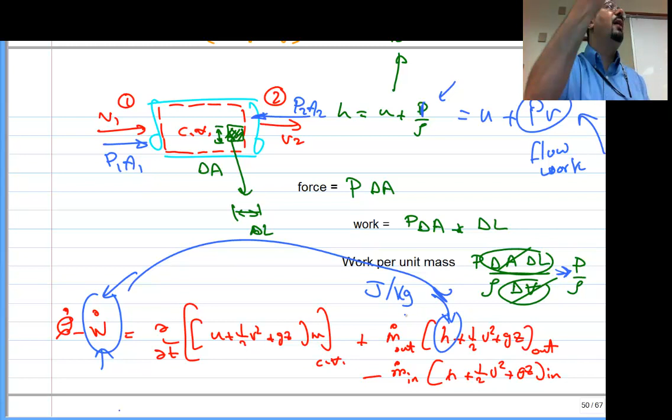That's why when you're dealing with a system, if you have a cylinder in your design project, and that cylinder is expanding so you're pushing something, you will never have enthalpy - you'll have internal energy. But if you have a pipe where things come in and leave, they come with their enthalpy and leave with enthalpy. Why? Because you don't want to calculate the work you need to spend to get them out. So you tell yourself they're leaving with enthalpy - to leave, they have to get this extra energy to overcome the pressure force in their face that will hit them if they try to come out.

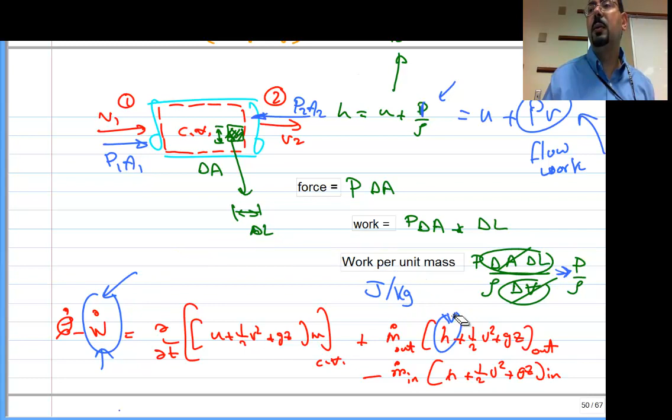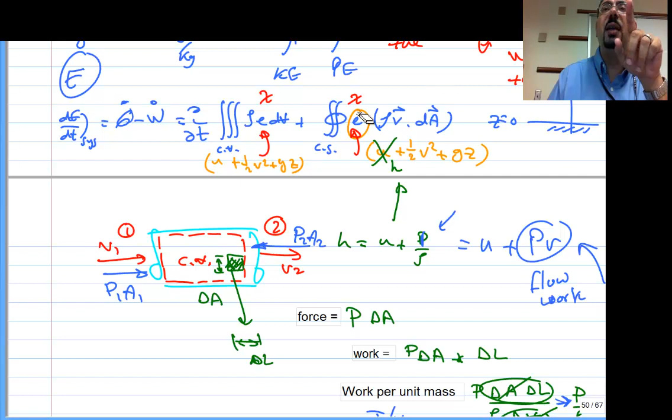Alright, so no mystery - he leaves with enthalpy, and when he stays in, he stays with his internal energy. So that's the fancy form, but the simple equation is: Q minus W equals how much internal energy plus kinetic plus potential you have, plus m dot out times H plus half V squared plus GZ, minus m dot in times H plus half V squared plus GZ. And if the problem is steady state, which most problems are, then simply Q minus W equals m dot out H out minus m dot in H in.

Actually, when you look at a compressor or turbine where energy is coming in and leaving with Q and W, you didn't need 5 minutes of me talking about this. You could immediately say, forget about plus Q and minus - I'll just say energy in equals energy out. Those guys come in, those guys leave. So at the end of the day, Q plus m dot in energy in equals work plus all the energy out. Done. So if you're asked for the power or how much heat transfer is happening across the wall, anything the problem is asking for, you basically fill in the gap and finish the problem.

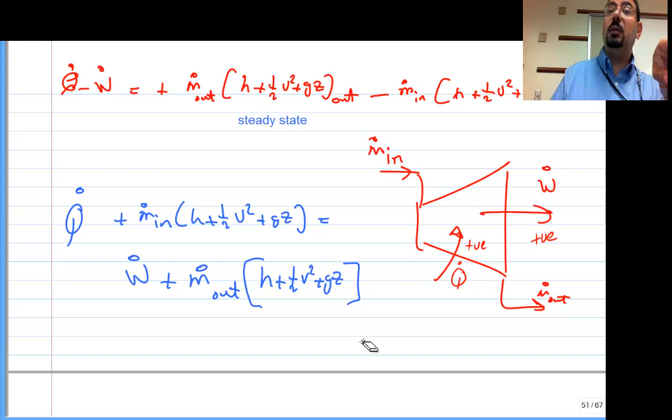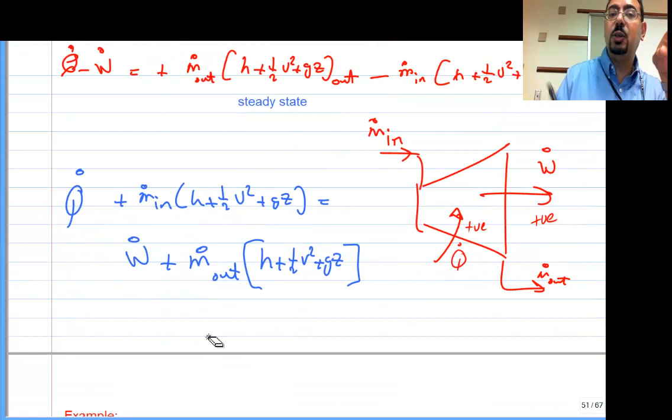So are you fine with just writing it in that form? Again, this equation really only holds for steady state. If the problem is unsteady, maybe you have to add this extra term - the unsteady term. But if the problem is steady state, yes, you start here. Questions?